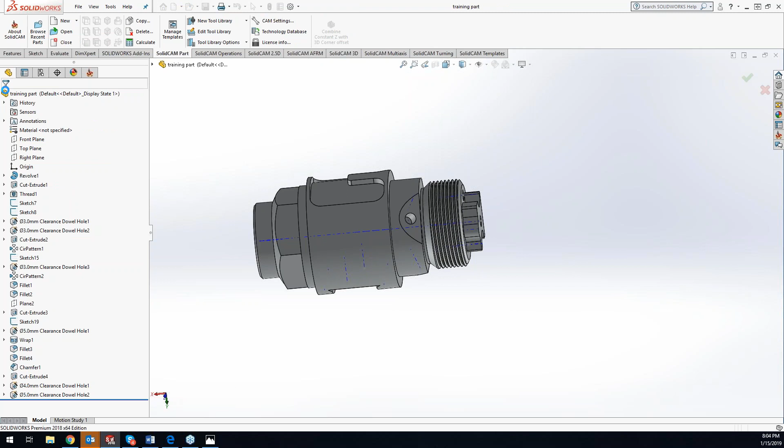So from right here, we'll just go to SolidCAM new milling, or I'm sorry, new mill turn, and we'll just do it as external. And like I said, we're going to take this part from absolute start to finish here. This is something we're going to be going over for the next few weeks.

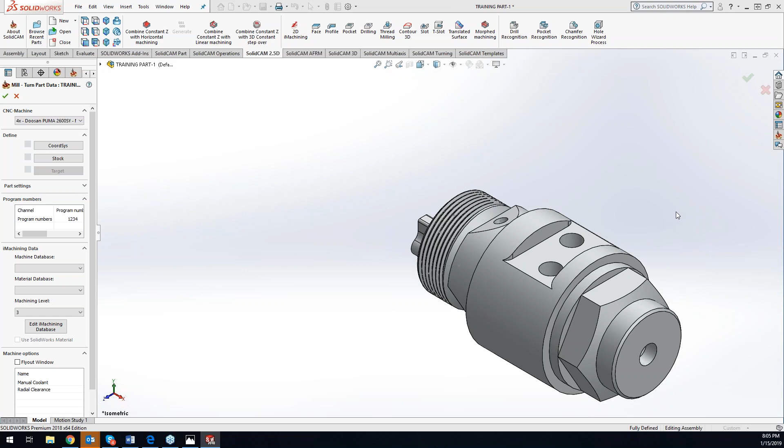I have the time slotted for you guys to do this over a 4-week period, but if we finish this up sooner, we'll slide something else in there. So I just wasn't sure on how much to allocate for this part doing the Swiss. So we may be a little bit off, as Greg was telling me earlier.

Okay, so we're going to grab our Citizen post processor right here, and this, when you guys do purchase, it is going to be provided for you guys.

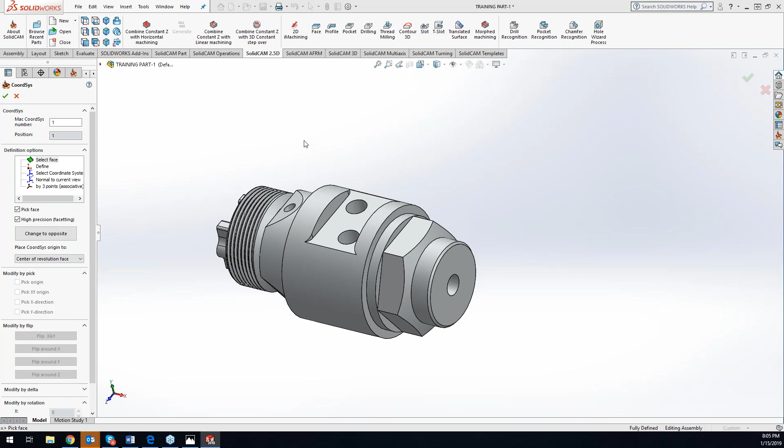Now, creating a coordinate system. A lot of you guys that have been watching the night classes over the last few years will notice that with the Swiss, it's identical to mill turn. There's no difference at all. You set it up the same way with coord sys. There's a little bit of difference with the setup, but when it comes to actual programming, it's going to be the exact same thing as milling or turning for you guys.

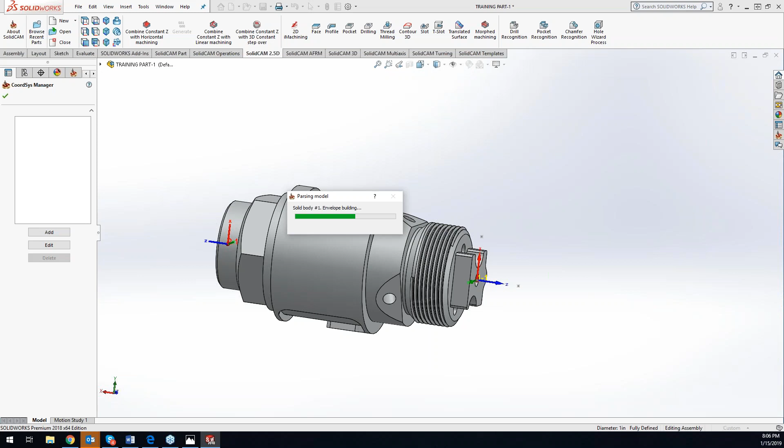All right, so we'll just do center of revolution, and we'll call it good right there. What it's actually going to do is create a second coordinate system for us, and right now it's creating an envelope of the actual turn revolved model and building our stock. As we're going through this, I expect Greg to hop in here every once in a while and get me on the straight and narrow too, as he's a little bit more well versed in the Swiss stuff.

Well, I think my computer's still catching up there, Kevin. Okay, I may have to feed the gerbils that are powering my internet right now. A little bit of lag. Oh yeah, lots of lag on my end.

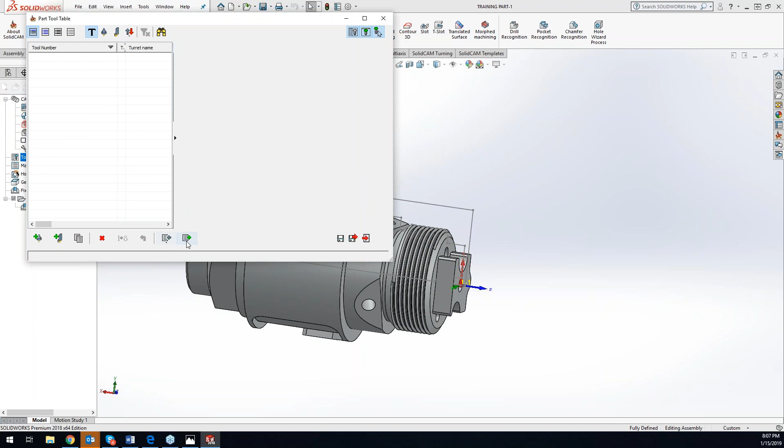So let's import my tools here. And that's it, do all. Tool number one is always going to be your part off tool, so keep that in mind. Now that I've got my tools in here, we're going to save that.

Now what we're going to get into is the setup. The setup is the exact same as what you guys have seen in the past with all our setups, but the biggest thing here is there is no clamping fixture for the main spindle. Every once in a while when using the back spindle with an extended collet or extended guide bushing, we'd use that as a fixture, but otherwise we are not using any fixture, so you want to set that to none.

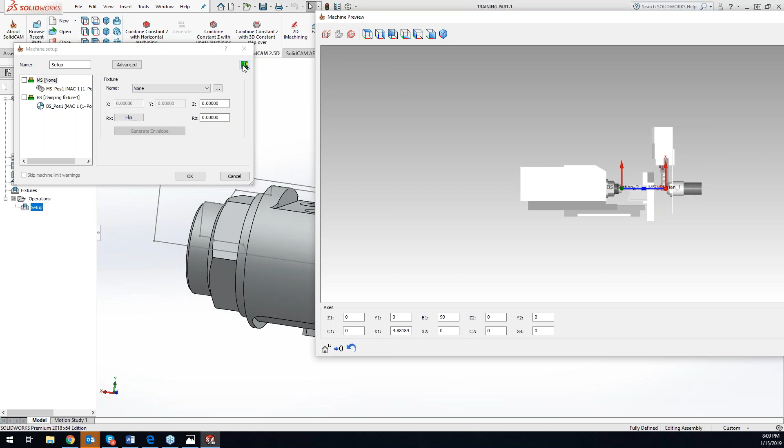This button up here, the machine preview, you're going to get used to using a lot, especially with the Swiss, because everything is so tight in there and clearances are key. You can hit machine preview to see what's going on. If I hit this icon that says focus on target, it brings me right into where my part is located at that specific time. We want to make sure these are all zeroed out.

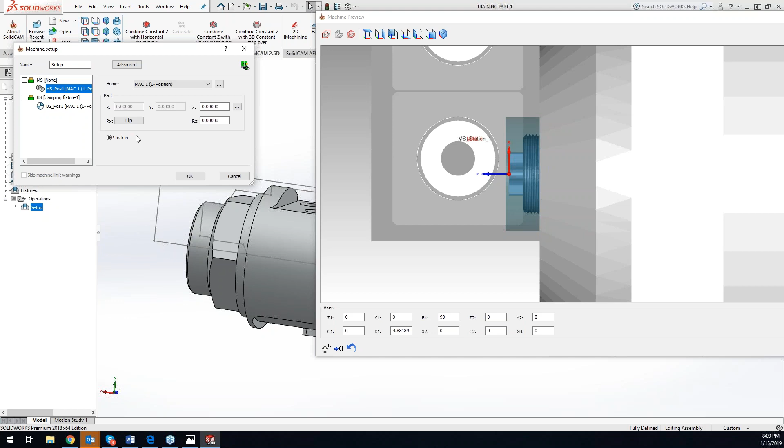Another thing, kind of like with our mill turn, for our main spindle we want to have that set as stock in. If I zoom out here, you can get a picture of the machine: we've got the main spindle over here, the sub spindle or back spindle over here, and our gang static.

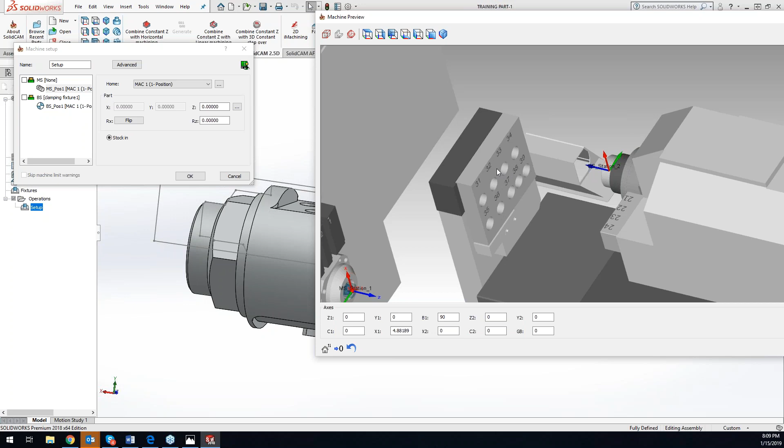I think the top are static, Greg, and the bottom are live, or is it the reverse? No, you're going to have a combination of both. The top ones are definitely dynamic tools. 37, 38, and 39 are static, but the rest are capable of being driven, for this particular module.

On the main spindle here, you'll see that we have tool 1, 2, 3, 4, 5 for your lathe tooling. And we have our B-axis head over here, which is live for 11, 12, 13, 14. We're showing this right now as a star machine, so if you guys are running a Citizen or a Sagami, it may look just a little bit different. But when you guys get the Swiss, go ahead.

Real quick Kevin, this one is the Citizen. Oh, what did I say? The star? Oh sorry, I'm getting everybody mixed up. So yeah, this is the Citizen, not the star.

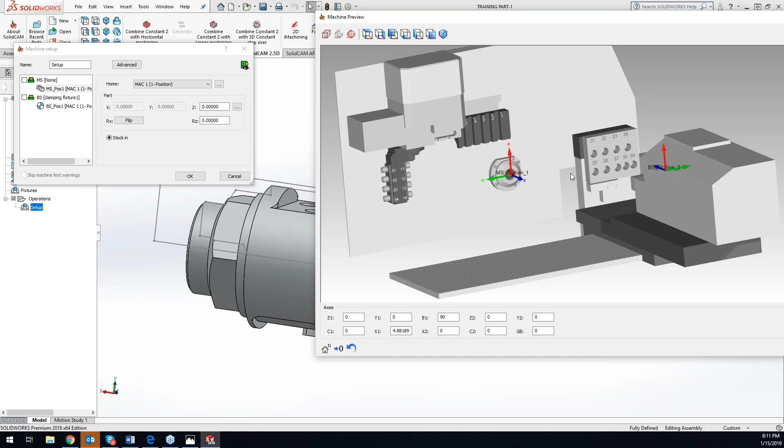These machine previews will be based off of your machine, which would be created by either Greg Payton or Greg Abbas. Okay, so that is our machine setup here.

Now that we have our tooling in there and our setup in there, you don't have to bring the tooling in right away. You guys can do that as you add it in there, but since I have the tooling built for this particular part, I'll just kind of skip through that process since we've seen all the tools being built before. So let's get into programming now.

Like I said before, simple, easy, basic stuff. So I'll just do a regular turning facing operation.

Oh, I'm sorry, I got ahead of myself here. So before we can start...

What we want to do is insert what is called an MCO, which is a machine control operation, and we want to add the machining data.

So in the machining data, what's actually going to happen is the part-off tool will come in there and part it off, creating kind of a machine reference point, not zero, but a reference point.

So we'll add that MCO in here and I can show you guys what it looks like. Here's all the MCOs that are predefined for this machine. If you're running a Star or Sagami, these will all be different for you as well—it's dependent on the machine.

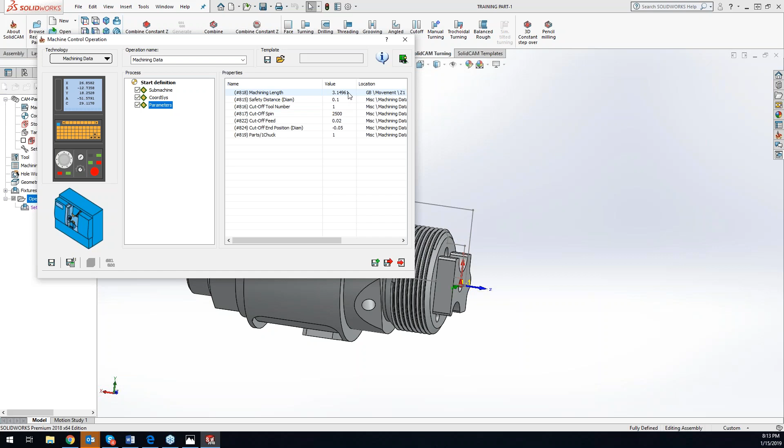I did go over something a little too fast, but when we did the stock right here, if you guys are using a bar puller, you only keep the stock to the stock size of your part. Don't take into consideration your entire 8-foot long bar sitting out there.

It's just going to be the size of your part plus whatever you want to clean up both ends. So we've got our machining length in here, safety distance—it's calling up tool number 1 to do a cutoff, just doing a spin right here, and a cutoff feed, the end position and diameter of clearance, and then...

Part chuck 1—I'm trying to remember what that one is. Greg, do you remember offhand? Or is that just a number parameter?

That's how many parts you want to run within that same feed out. So if you're going to be doing 2 or 3 different parts with the same headstock moving, it's just how many parts that headstock can push out before it has to reposition itself.

Gotcha, with the bar feeder. And we're setting this part up as if we're running in a guide bushing, so the part can go throughout that guide bushing.

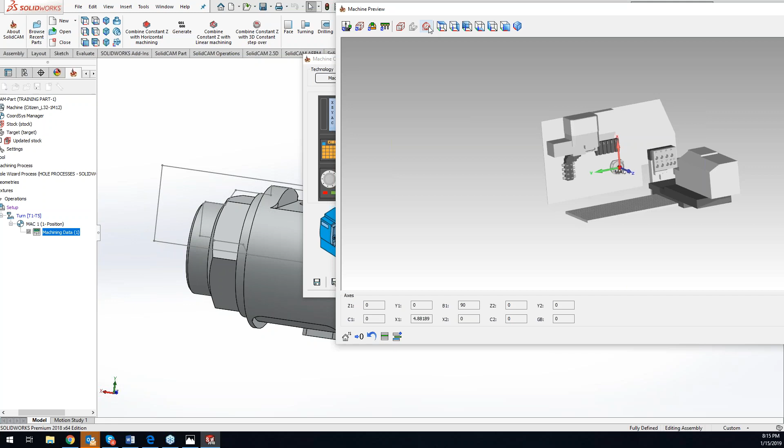If I zoom in here, we should see our tooling here, so you can see it's lined up. Everything's ready to go for that tool number 1 to do that reference point right there.

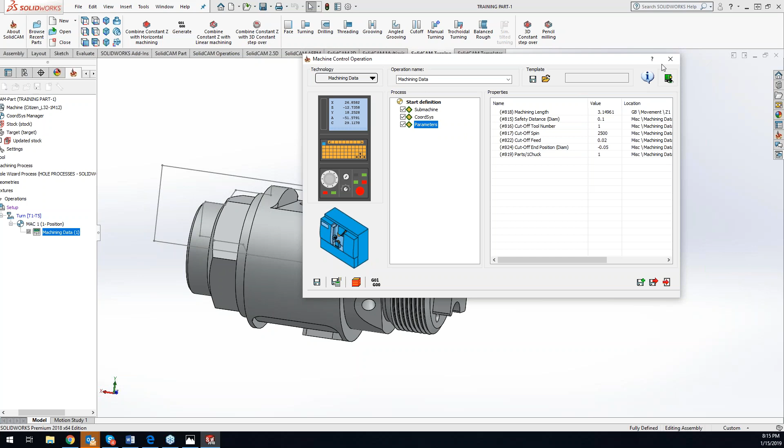So now that we've got that set, we can start doing our turning. I'll just do a facing here, and that's going to be our Mac 1, position 1. Just like what we're all used to doing, just a simple facing operation here.

So I'll do auto extend to my stock, hit the green check mark. We're going to be facing off that material.

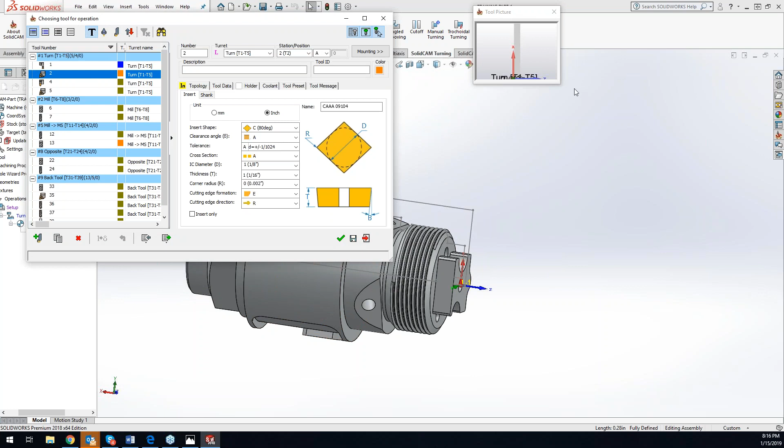And I'll grab a tool—tool number 1 is my cutoff, tool number 2 is going to be my tool here. Let me bring this in, you can rotate it around and see it. So just a simple roughing and finishing tool.

CAAA insert, green check mark. Levels, I'm not going to be too concerned, staying away from that 78 thou. Now technology, just doing a simple facing. We can set it to finish, and save and calculate.

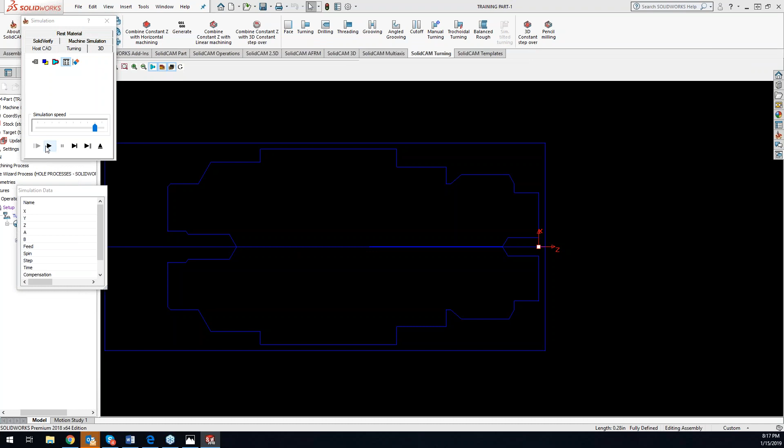So now if we go to our turning, pretty much like what we've seen all the way through, let's take a peek at our machine simulation.

Okay, let all the tools get loaded up here.

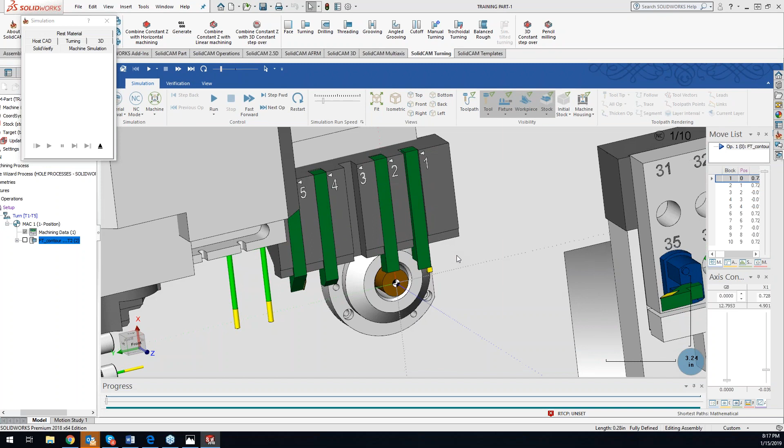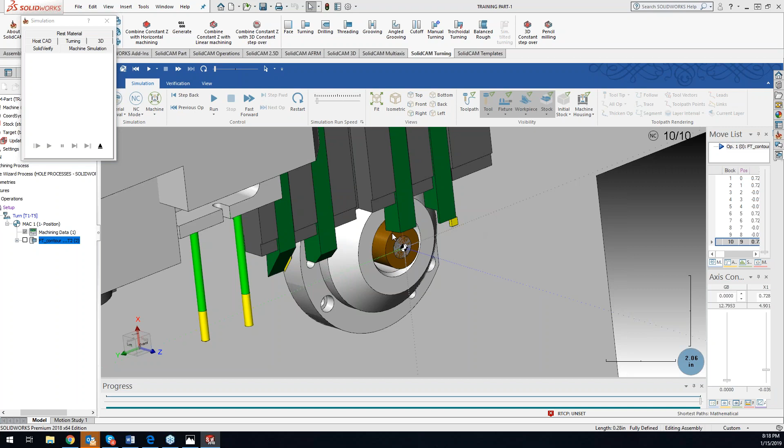So if I zoom in here, you can see our tool number 2, our roughing and finishing. Let's slow this way down. So it did the roughing and the finishing pass, and now we're up to size on that face. For those of you not used to programming Swiss machines, even for myself, it's different seeing that material go in and out of the spindle versus the tooling moving back and forth. Okay, so we're good on our facing.

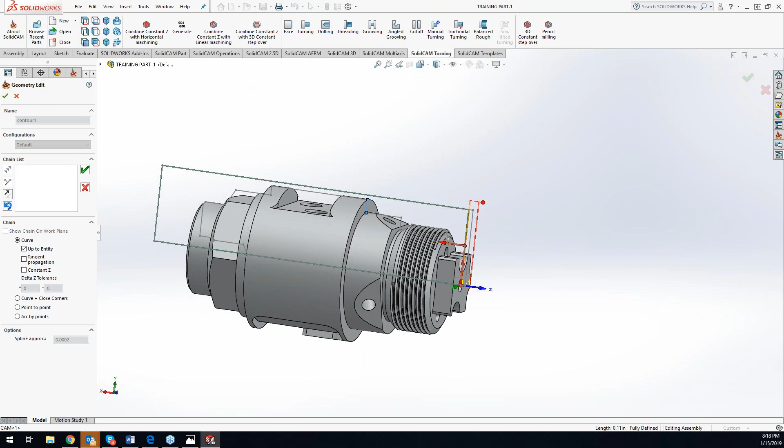So let's do our OD now. What I can do is just do a regular turning, and we'll chain this part up to right here. I'll just auto extend this to our end here, and we'll use that same tool. We'll do a finish as well. Hit OK. And let's do a turning up right here.

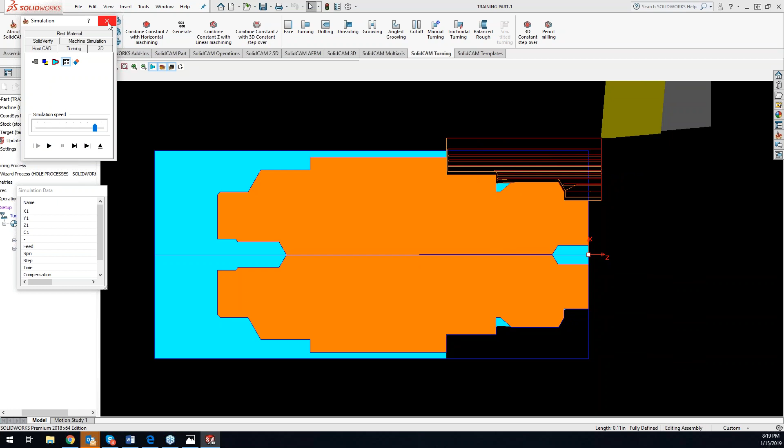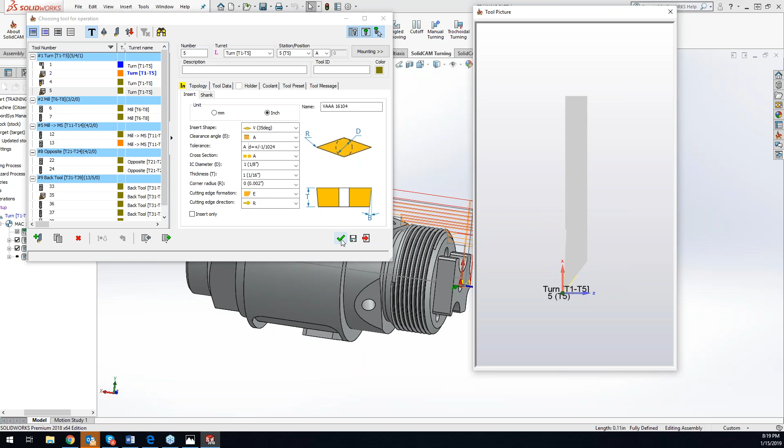So our tool can't quite get all the way down in that deep groove. What we can do is just make a copy of what we've done right here, and let's do save and copy. We'll switch it out to a different tool. Do select here... and this one, yep. I can just do save and calculate from right here, and it's just going to come in and clean up that area that was left off.

Maybe I want to take just a skim pass over the entire thing. So what we can do is go to our technology, and instead of doing rest material on the finishing, I can just do entire geometry. Save and calculate, and turning. It's going to take a little bite out of there, and now we should be able to get in there. Yep.

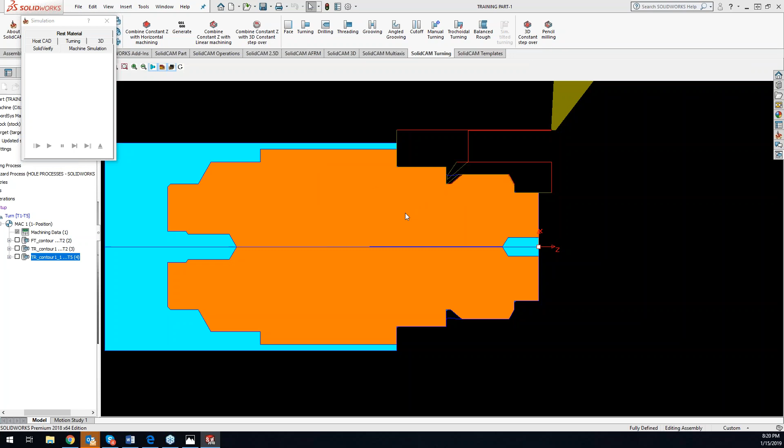Real quick, before you go into that, what version are you working in for this particular demonstration, Kevin? We are 2018 Service Pack 2 Hotfix 6.

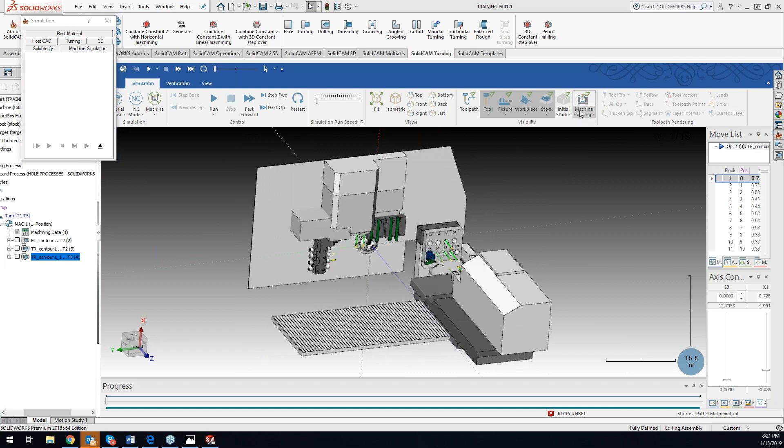For those currently running Swiss, it's very important that if you're using a guide bushing, you don't want to do any OD turning longer than that guide bushing, because you don't want sharp corners slamming into that bushing as the headstock pulls material in and out. One of the new features in SolidCAM 2019 is the ability to chamfer the stock in case you do need to do anything longer, so you have a land to go into that guide bushing with. Hopefully we'll do a KevCAM night class showing that functionality in the future. That's something happening currently and will be available in the next release of SolidCAM. Yeah, great point, forgot about that part.

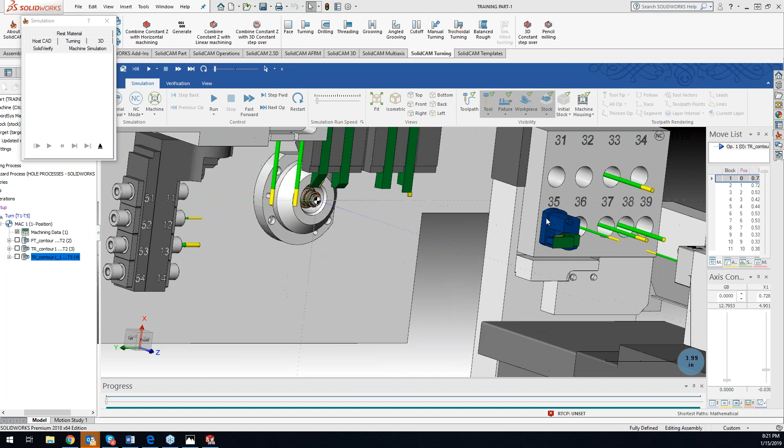Okay, so now let's get zoomed in here and run that through real slow. Come get that little piece out of there and do its finishing all the way through. Our workpiece retracts back in there for, not home position, but safety distance.

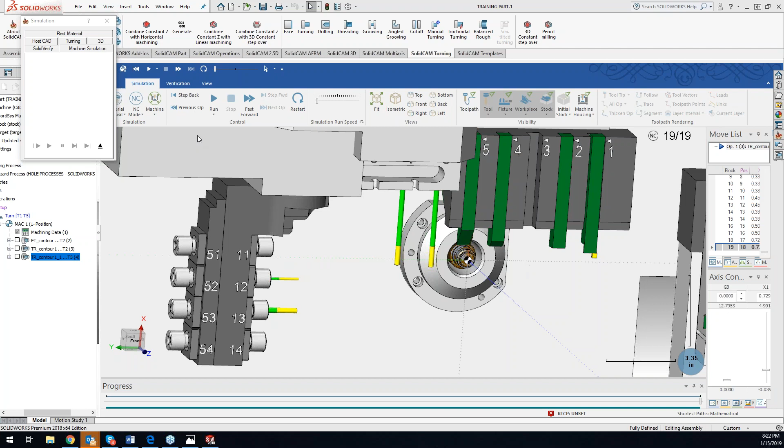Okay, now with Swiss too, what I was going to say is get used to using your machine sim nonstop, get used to using your machine preview nonstop, because like I said before, with Swiss machines there's a lot of stuff packed into a little tiny area, and clearance is number one for everything. So definitely want to check all that stuff out.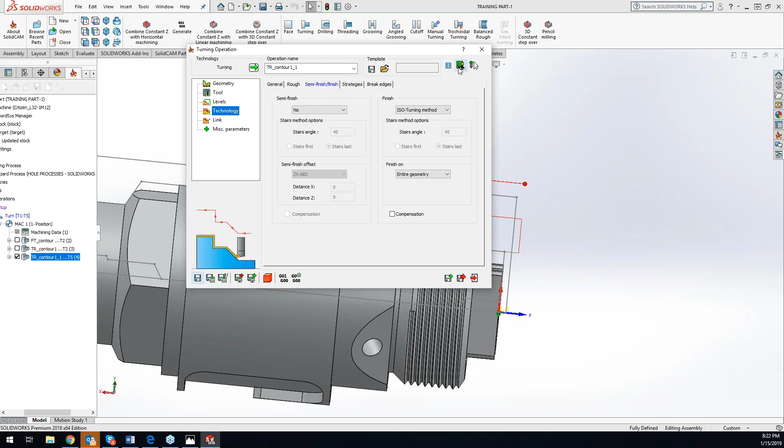So now what I want to do is use the static tooling from my gang tooling on the back spindle. Before I do that, I need to get everything kind of aligned, and I'm going to do what's called a machine pattern. Each machine has its own machine patterns.

Since we're running a Citizen here, Citizen has, was it 6 different machine patterns, Greg? Yeah, I believe it's 5 or 6. We're going to have 600, 610, 650, 630, and each one of these does a certain cycle, call it like a machining cycle, I guess you could say.

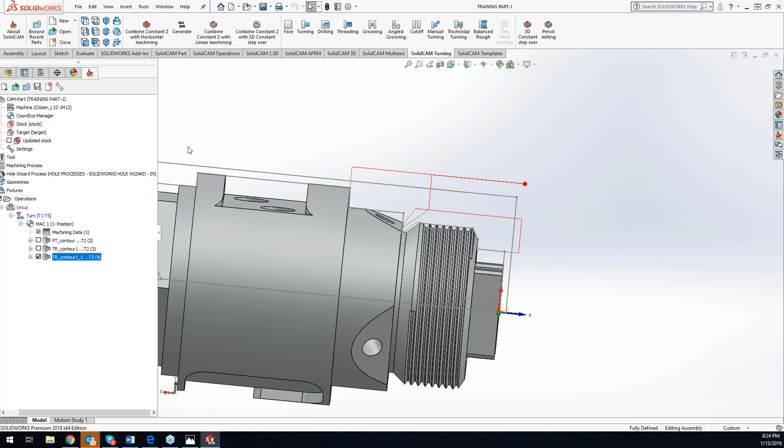So what I want to do here is start my pattern, and get everything lined up with the main spindle, my X and Z lined up. What you can do is go into our add machine control. We'll do a G610 X, my X2 Z2. This kind of locates that sub spindle and calls for that tooling to be lined up with the main spindle to that backside tooling.

I think it'd be good to show a machine preview, that way you can let everybody know just what tooling you're intending to work with. Yeah, good call. So I am intending to use tool number 24, which, yeah, you had a great point, Greg.

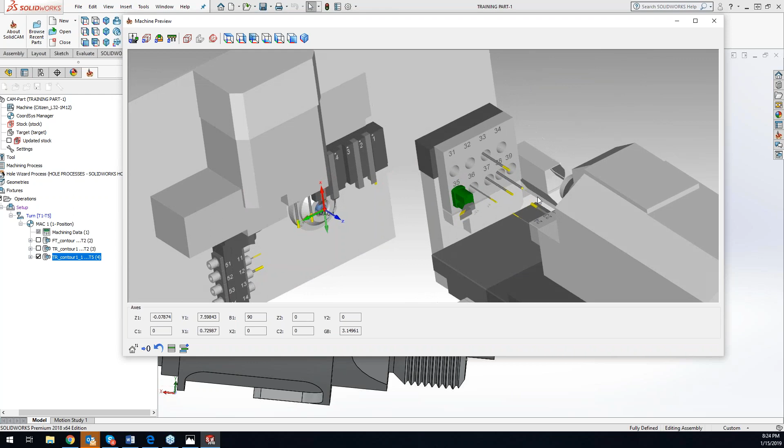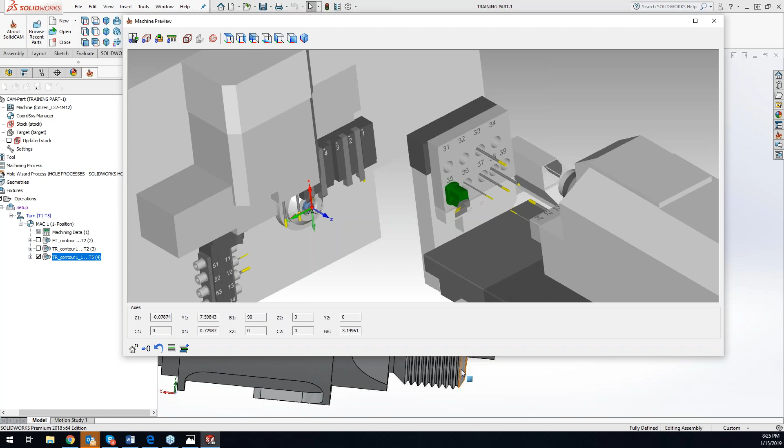So I'm going to try to give this a view here where you guys can all see it. So my tool number 24 over on my sub spindle over here, like I said, is set to static. So basically what's happening with this G610 pattern is we're getting everything lined up so it can use this drill over on the sub spindle. And my goal is to just do a center drill and drill out this center hole. Just kind of move this out of the way. Minimize this hole right here in the center.

And like Greg was saying, you always want to double check your machine preview. It's pretty much in every menu inside the mill turn, to make sure you know what tooling you're going to be using and all that stuff. Now this is where it's nice to have your tooling set up ahead of time, so you can come in here and see what tooling you have and where it's located. Now obviously if I'm using tool number 24, I cannot use that for the main. That can only be used for the sub.

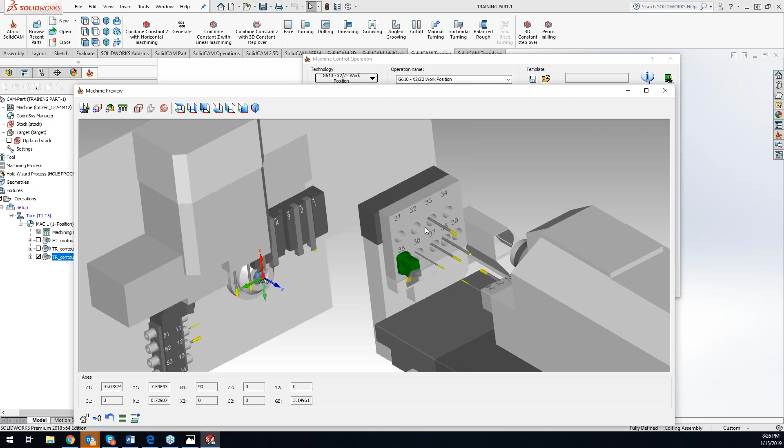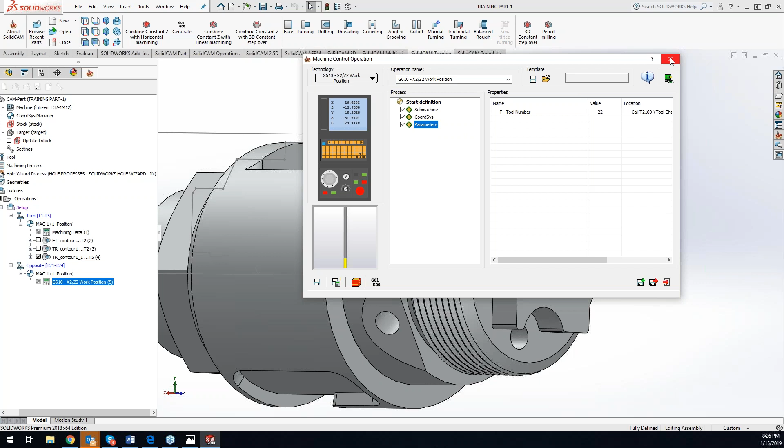So did I cover that all good, Greg? See if we can calculate. Yeah, I think for the most part, the short end of it is we're allowing the X2 axis to work on the Z1 axis, which is an axis that it wouldn't normally be working on. So what we have to do is go into a different axis pattern to allow those two axes to line up. There you go. Okay, so now that we have those axes all lined up, now I can do my drilling.

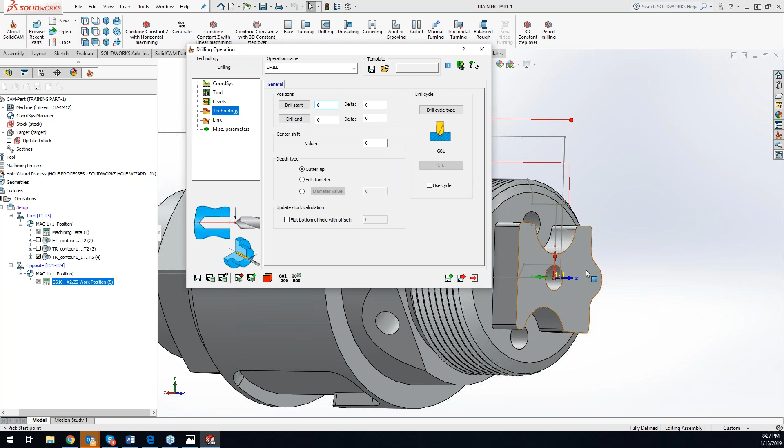All right, so I'll set up our levels here. Start level, I'll just click on my face. And end, go down to that point, and we'll just do cutter tip. Good enough. Save and calculate. And let's take a peek and see what's going on here. Okay, there it goes. Now, with the machine simulation, it does take a little bit longer to pull up because there's so much going on in here. The more powerful computer you're running, the faster it will be for you.

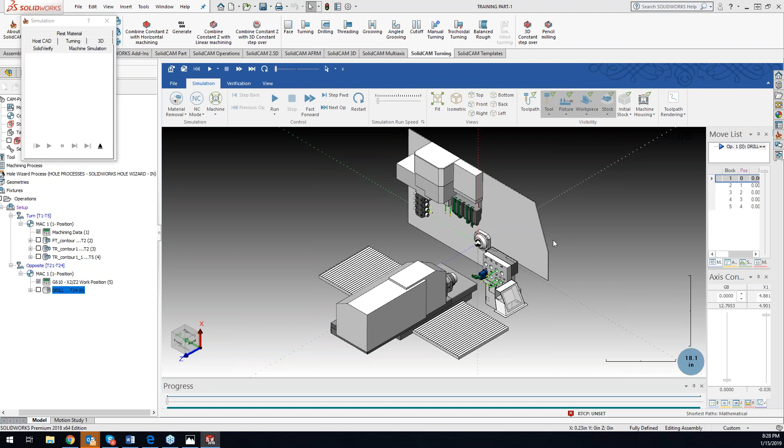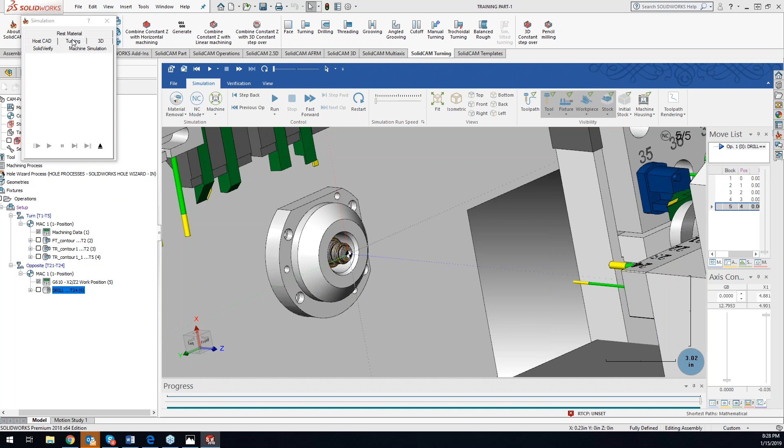But all right, so let's get into our part here. We'll run it through real slow. And it's going so fast that we're not even seeing it. Let me just do a quick turn in here to make sure I get everything set up. Yep. Okay, so the machine simulation was just playing a little too fast, so it was showing it as a quick dart in and out. But that's essentially what we're doing right there, just a simple drilling operation.

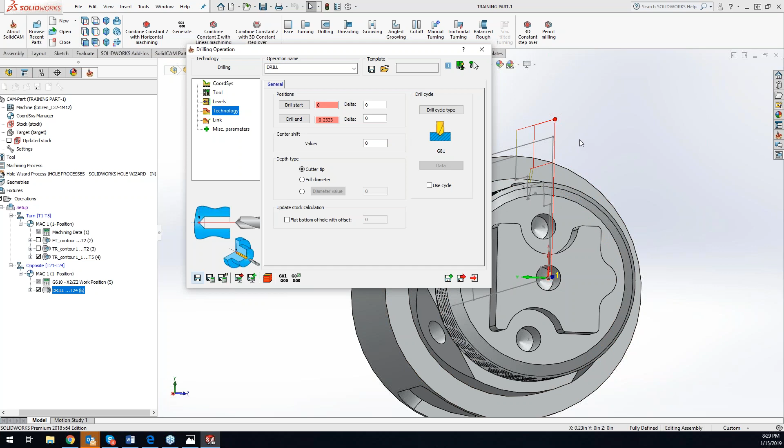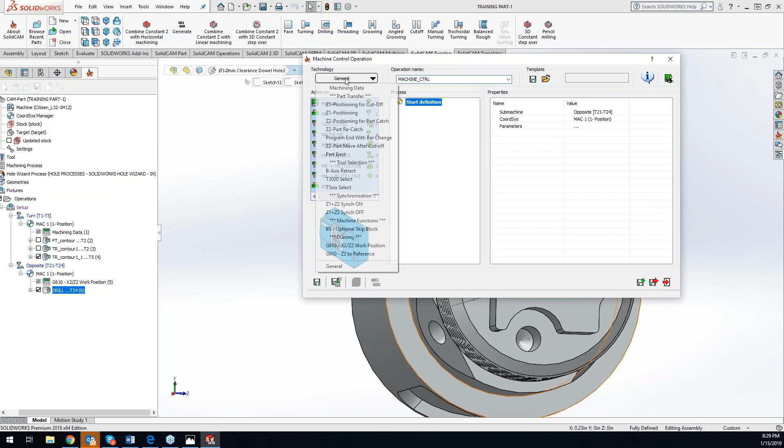So now that we have our drilling operation set up, what we need to do is send that sub spindle back to the reference position, so it can go back and start working on its other stuff on that sub. We'll get into that in the last part of the class with the channel sync. So I need to send that sub spindle back home. So we're going to create another MCO. Oops. And there we go. I'm going to grab that same pattern, except just do the Z2 to reference. Basically this is just sending it back to its reference spot. And we can see that in our machine preview.

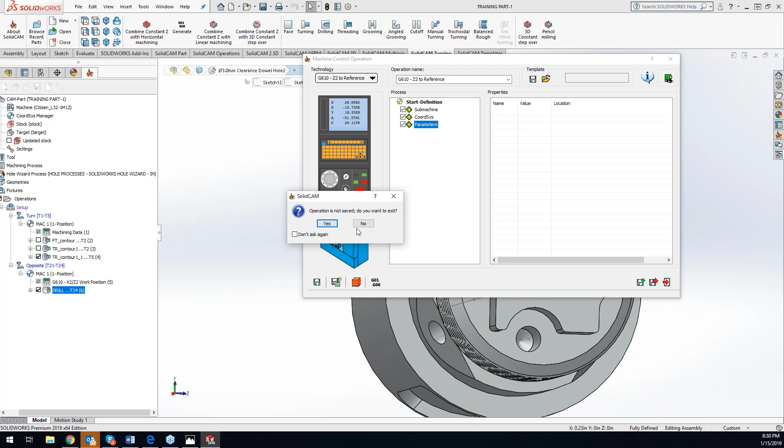And update stock, update fixture. I was thinking it was going to show it moving back, but maybe not. Maybe I'm wrong here. Okay. So we're going back to our home position. Once we create our next operation, we'll actually see that happen. So we're going to exit. Save and calculate. And we can do a simulate right here, just on that MCO.

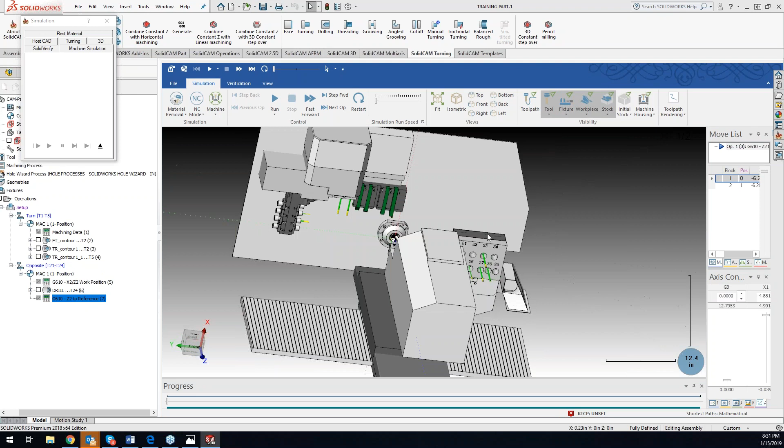All right, so it's kind of back at its position spot, and now it should retract back. So yep, it just retracted back, and now this spindle can keep working on over here with this set of tooling, and we can keep continuing on over here. So basically, it's just telling it to do a go home move, is essentially what's going on there. Any questions so far?

I don't even have the questions panel up, so Andrew would have to fill me in if there are any, but I didn't hear anything yet. Not so far. Tell you what, it looks like minds are blown. We're blowing minds, or we have eyes glazed over. You have Swiss screwed everybody's brain right now.

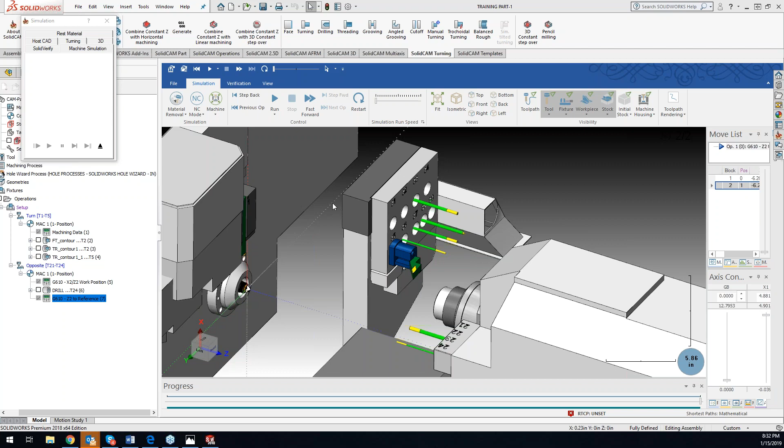That was good. So we're going to keep continuing programming this part, but as you guys can see, we're just doing basic, simple milling or turning. The only thing that's out of the ordinary is having these MCOs in there to create our reference point, to align the sub spindle to do a drilling operation on the main spindle, to send that sub spindle back home.

So there's not a whole lot to the Swiss, and I definitely admit it, even myself, when you mention Swiss, it's like, oh man, this is going to be some hard stuff. Once you get into it, it's quite easy, especially the way that Daniel and Greg Payton and Greg Abbas are going to be setting up the posts for you guys. Really simplified things to make it as easy as possible for you guys as well.

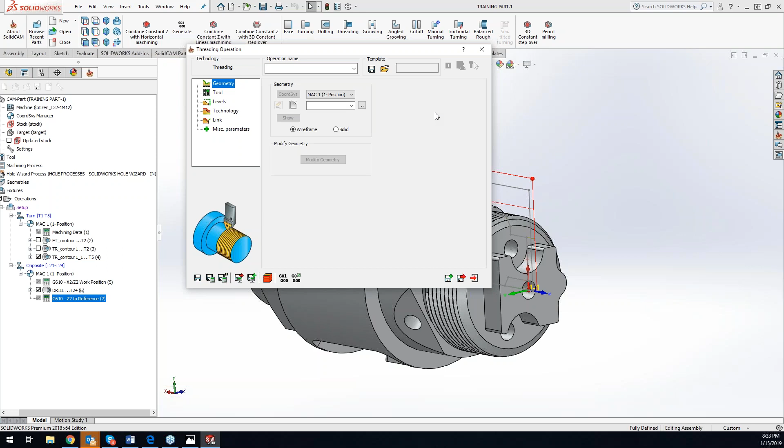A lot of pressure there, Greg, so don't mess up. All right. Yeah, it's not going to be a problem. I'm giving everything to Greg Abbas. He's the mastermind behind this operation. Okay, so I'm just the face, the pretty face. Exactly. The face for GoToMeeting webinar. Yeah. With no camera. The face for radio. The face for radio, that's right. Yep.

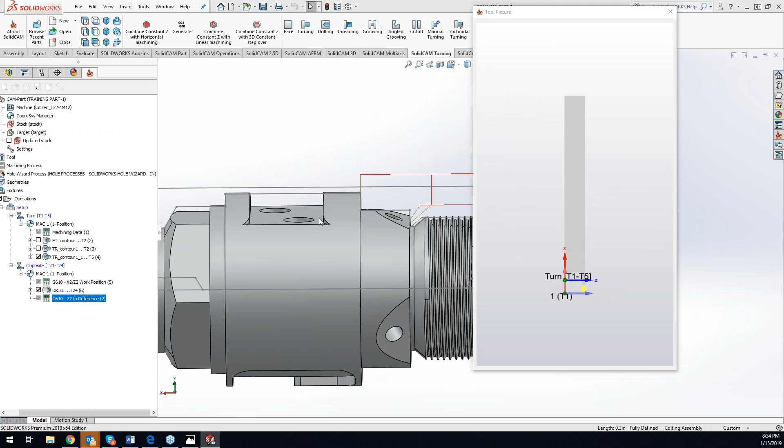Okay, so now we are going to do our threads. So what I'm going to do here is grab a straight line that's going across these threads right here. And we'll accept that. And we are going to be using our threading tool, which is on the 1 through 5 section. And that's not our threader. Yep, there's our threading tool. So we'll grab that guy.

And we'll hop over to technology here and finish allowance. Let's do 5 thou finish pass. I just know because I'm looking at the print that this is 16 threads per inch. And I want a thread depth of 20 thou. And we'll do a finish pass on our threads.

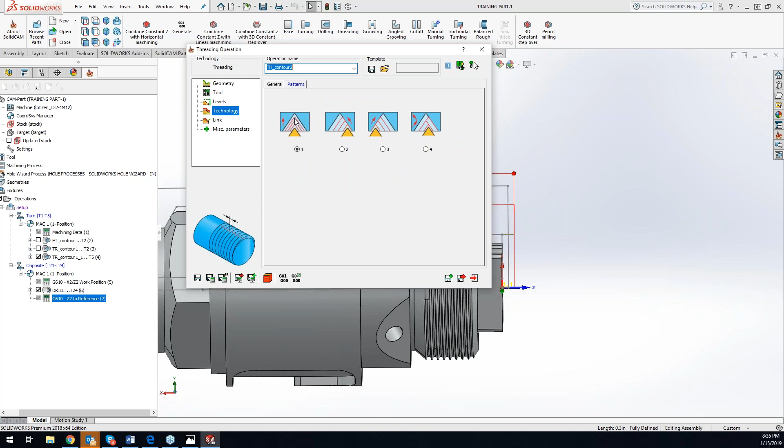Okay, looks good. For those guys that didn't know, I think I covered this in the threading, but you do have the option to do different patterns for your threading. So right now it's just going through the center, working its way, but you can start over on the left side, right side, vice versa. So let's hit calculate. And definitely make sure your machine supports it, because not all machines support the different threading patterns.

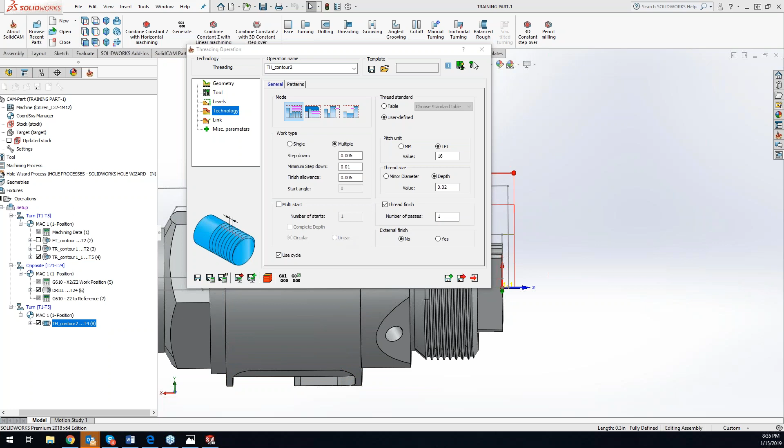And if you do want to change up your threading patterns and the machine does support it, make sure you get with your post-processor writer. That way it can be built into your post. Yeah, because you might be selecting a specific pattern that you want, and it's not outputting that pattern. It's just doing the standard pattern. All right, okay, we save and calculate.

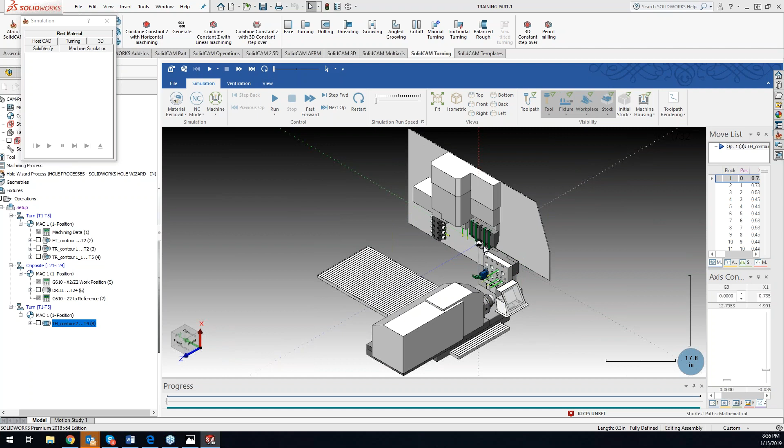Simulate this, and go to our machine sim here. You guys are going to get sick of me showing machine sim, but like I said, it's pretty essential just because there's so much going on. All right. And trying to get zoomed in on just the right part for you guys. So you can see our threading insert right here.

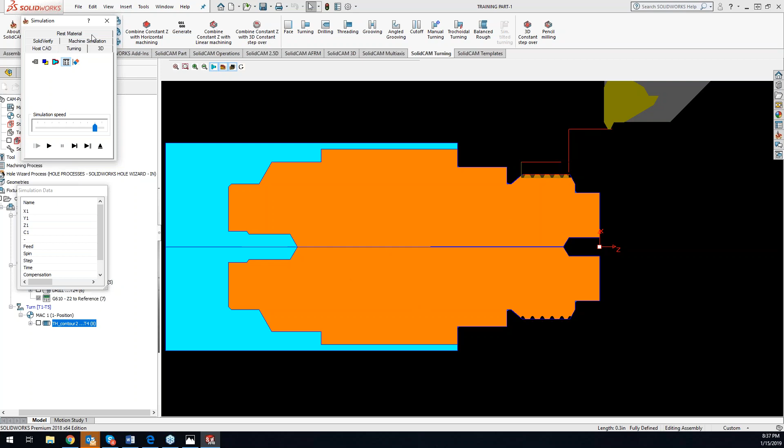Now it's not going to actually show physical threads on there. I think if we do SolidVerify, it may show the threads. Yep. So you can see your actual threads right there. Or if we go over to turning, it's going to kind of wipe out. Oh, it is showing it. So you're just not able to see everything that's going on. So the machine sim and the Solid Verify and everything kind of comes all into factor for you guys. Okay.

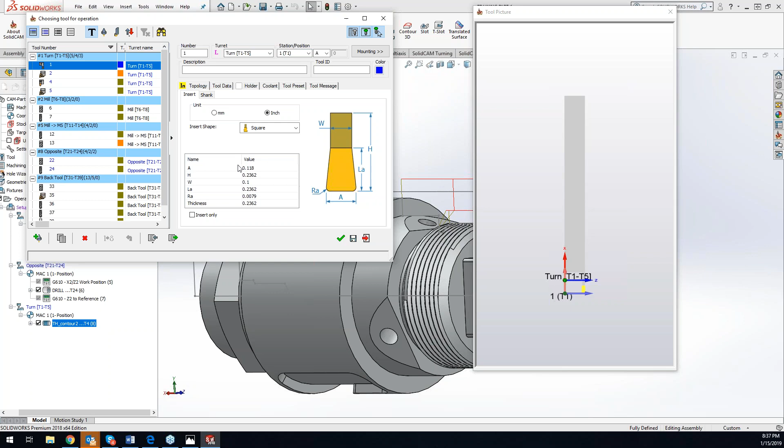So let's do the front face here. Pocket this material out of here, and then we can get to drilling out these two holes here. So for that, we're just going to go to our 2.5D, just do a pocket, and we'll do new geometry, and I'll utilize the Smart Face technology. So we got our two chains on there. One is marked as open. Tool, select, and I want to use live tooling. Here we go.

And that looks good. Upper level is right here. Lower level is right here. We'll take it all in one depth of cut. Pocketing, just as what we've normally seen. Save and calculate here. And let's just view it in Solid Verify real quick. That went really quick. Okay. Do machine sim.

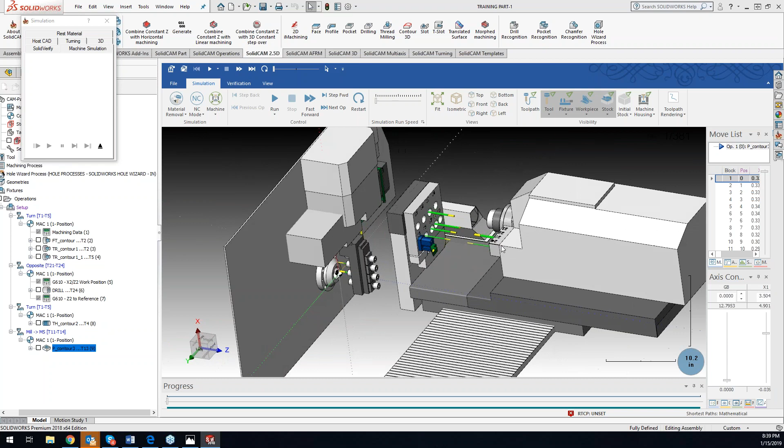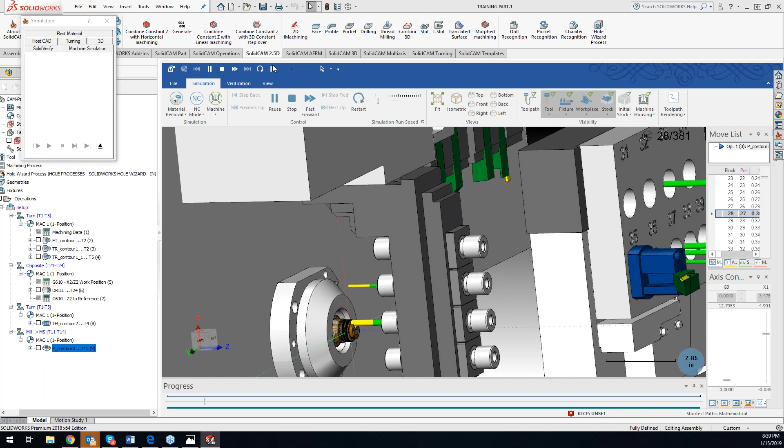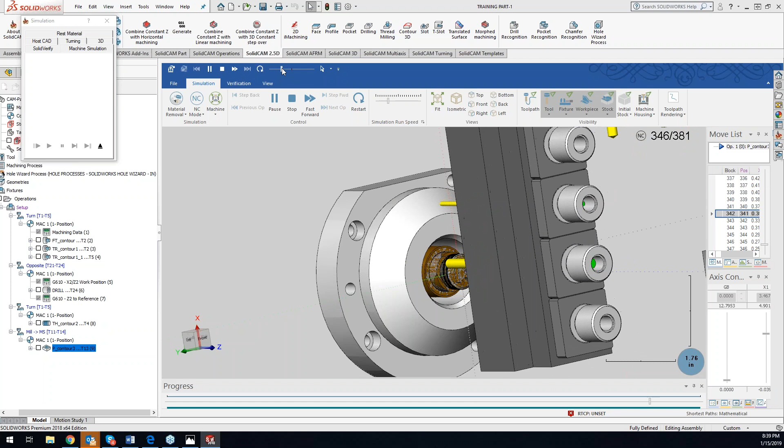Now, for that type of pocketing, are you doing anything special with the C-axis there? So I need to, well, we'll do two different ways. Unless I'm missing out on something that you're talking about, Greg. So you can see our tooling going around here. Speed up a little bit. Okay, so that's way one.

Now, I think what Greg is getting to is, if we go to our motion control and turn on fourth axis right here, one second here. No, you're correct. You want to be working on the face. Okay, so I want to make sure I was doing this right here. Save and calculate here. Now, let's do a simulate and machine sim. So basically that tool should stay stationary and the spindle should rotate now versus the tool going around it, if I'm thinking that correctly. Yeah, using the C-axis to make the cut as opposed to the XY.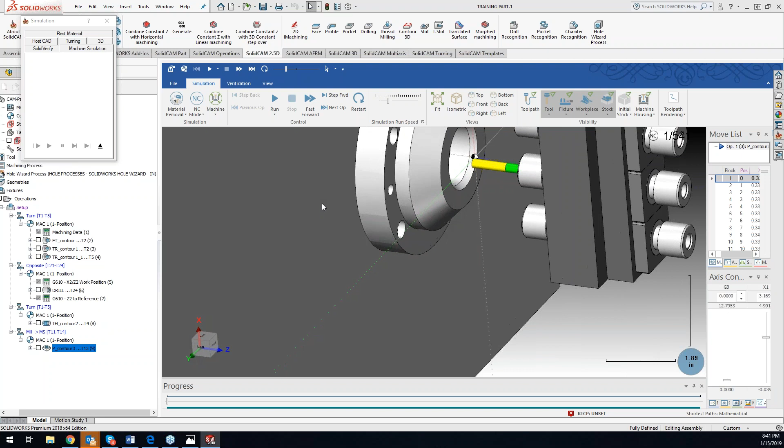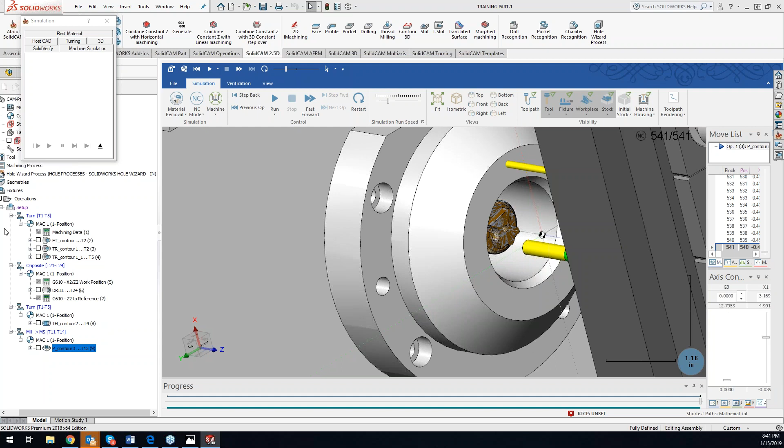All right, so get it zoomed in here and play this through. So now you can see our spindle. Yeah, what Greg was saying. There we go. Any questions on that at all for anybody? Okay.

Okay, so now basically we're going to do the same thing, except we're going to be drilling out those 2 holes. So I can come in here and do my milling drilling, because I cannot do a turning drilling because it's not on center, it's off center. So what I need to do is pull up my live tooling. So we'll do a drilling here and grab that face. Tool, select, and I need my live tooling for this. So it's going to be live tooling. And like I said before, you can always take a peek and make sure everything's where we want it.

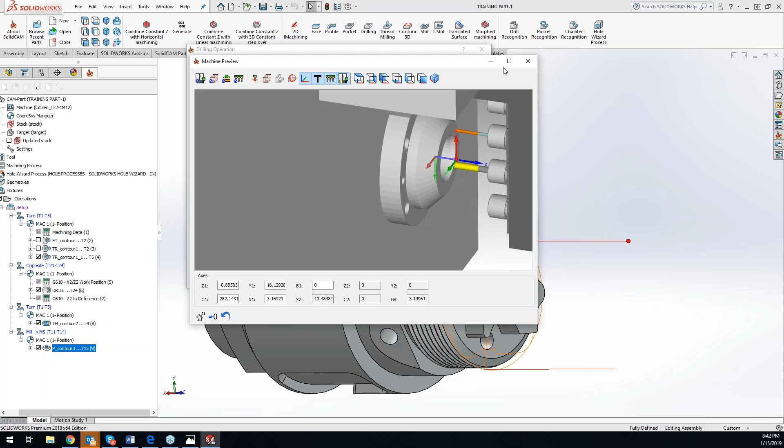And let's go to technology, levels, and our start is going to be here. And do our drill depth as our point. We're doing cutter tip. Technology, we'll just do a single drill. Save and calculate. Feed is not in range. Okay. So we can play this through and SolidVerify here. So just doing our basic drilling. Now, oops. If we go into our machine simulation here.

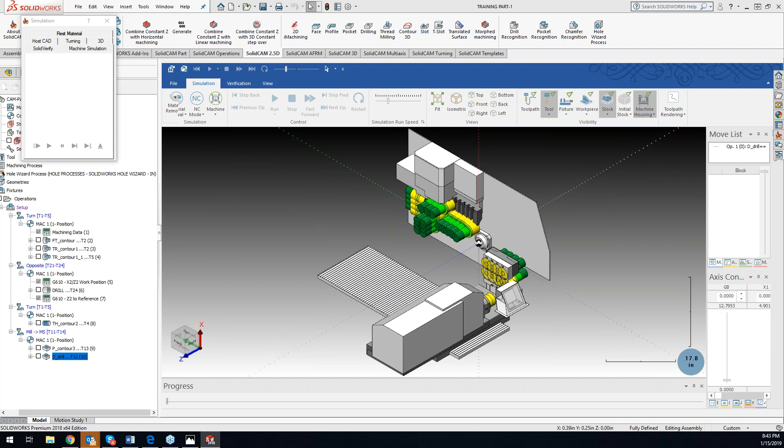Now, some of you guys may be looking at this, especially with the MCOs, and, well, how do I know what tooling is doing what and all that stuff? It's no different than you guys knowing your mill. You guys know what that mill can do. You know what tools are in what stations. And so, like with these MCOs, you know that anytime it goes to use a static tooling on this back spindle, we need to have those G610 patterns in there. So you may be asking yourself, well, why do I have to put it right here versus somewhere else? And it's all part of the machine.

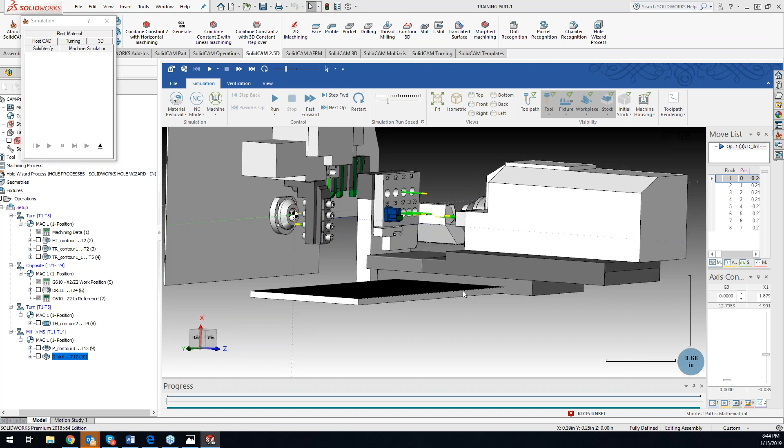So at least for the customers that we were on site with, Greg and I, they already knew what these patterns were, and they let us know where that machine had to move to. Hopefully I said that correctly. Okay, play that through. Ooh, fast. Play. So drill 1 hole, drill 2 hole. So pretty simple, easy.

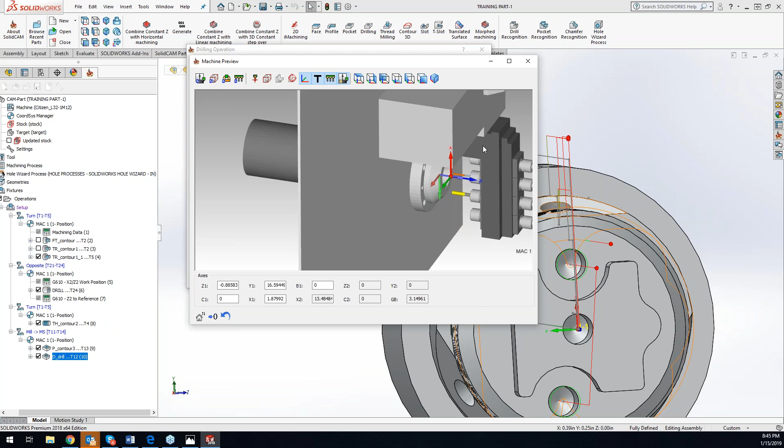Now, what I want to do here is I want to retract my B-axis to get it back to the home position. So as I see it right now, my B-axis is still in the way, so I cannot use any of my turning tools or any tooling on the back, just because the B-axis is sitting kind of in the way for us here. And so what we want to do here is do our next pockets, but I got to get that out of the way. So I'll shut up here and we'll go to another machine control here. And this particular one, we want the B-axis to retract. So I should be able to find B-axis retract, and more or less B-axis to go to its home position.

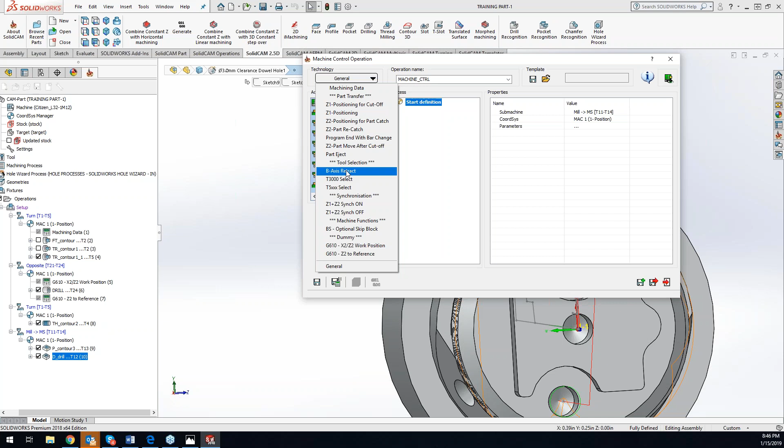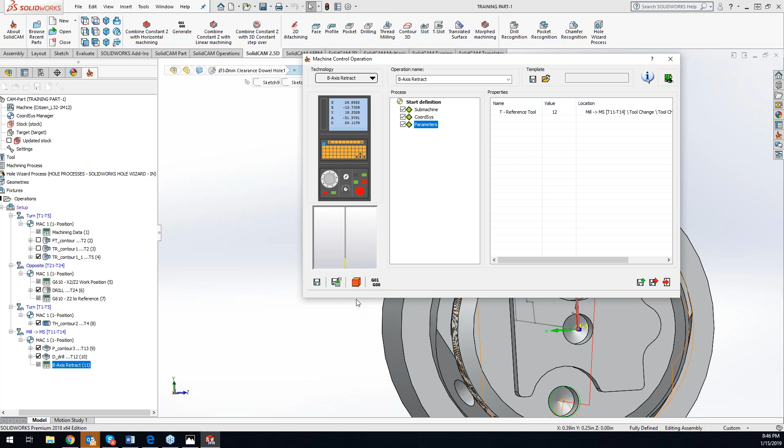Is there anything else I'm missing in here with the B-axis retract, Greg? No, it's basically just a macro cycle, or I guess not macro in a G-code perspective, but just a way for us to get that B-axis out of the way using a simple MCO cycle. So, yep, you're doing everything right. Perfect. All right, so we can do a save and calculate. If we want, we can just do a simulation on this.

Now, maybe Andrew can speak to this, but with the Swiss package, I believe Machine Sim is included, right? Yes.

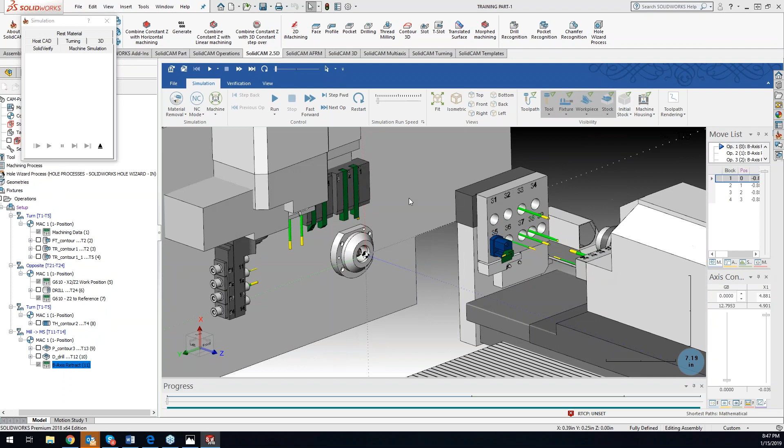Oh, it's already home. So it's showing its original position, and then it swung over to the left to get out of the way. So we can start using the tooling up here to do our pocket on the top next. But I want to stop right here.

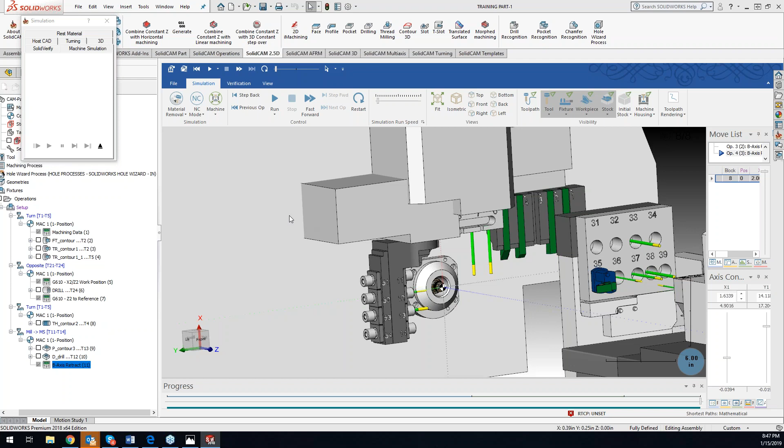Do we have any questions, guys? Because I know I just covered quite a bit more or less on the MCO side. But any questions going forward for what we got currently? If we don't, this is a good spot to kind of call it for a night. And we will get into finishing this space over here, doing our wrap functionality over here, and angle holes and all that fun stuff.

Greg, am I missing anything? No, I'm just seeing if we have anybody that's got a Swiss need in the crowd that might have any questions about what they saw this evening.

I did talk to Ronnie earlier today, and he said he's going to buy a Swiss package for the three main ones out there. So a Swiss for a Tsugami, Citizen, and a Star Machine. So, well, good for him. See if he can get a Groupon discount. Yeah. You'd see the chat section so I can see if he's even writing me back.

But yeah, next week we'll keep continuing on here. Like I said, we are going to program this part from start to finish, and I've made it through as much as I want to cover and fill your guys' head full of information for tonight. Next week we'll continue on programming this part for you guys. Randy says sure. Don't see any questions.